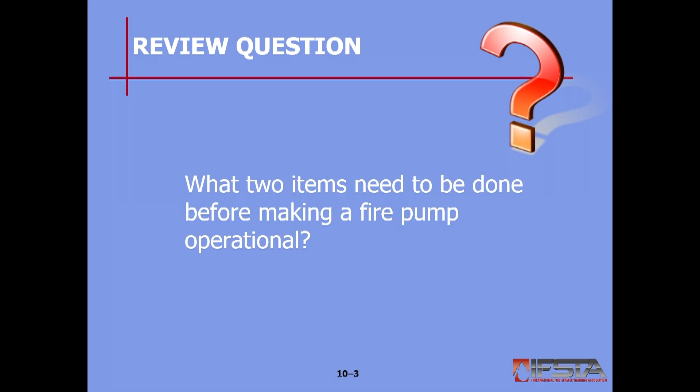What two items must be used before pumps are operational? The air brake and the chocks. We normally don't chock until maybe we got the pump in and we're flowing water, and we got a couple lines off. Then we'll chock it every time, Chief.

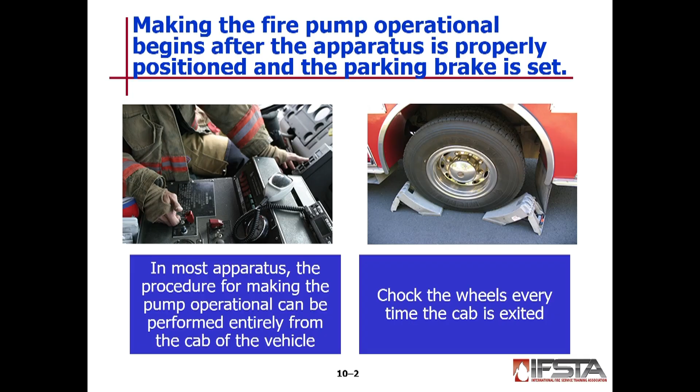Summarize facts about operating from the water tank. First thing we're going to do is use our onboard water tank. Even when we're connecting to a positive water supply, we've got 500 gallons on there, and typically we're going to get there, drop our tank, and I'm giving my tank water as we're hooking up to positive water. We cannot use the onboard tank as the sole supply of water unless it's something small, like a dumpster fire or a car fire maybe.

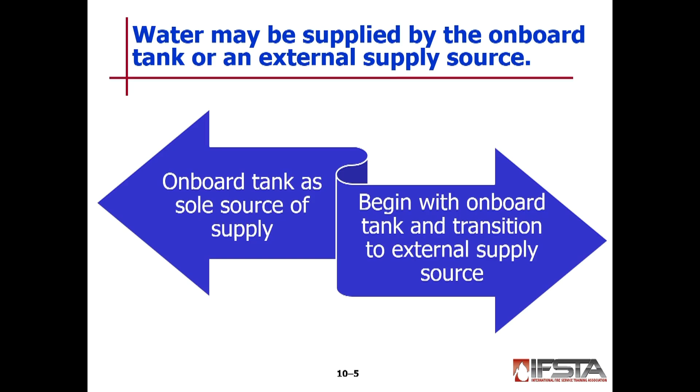Again, we're going to begin with our onboard tank, then transition to an external tank if we're depleting that. When putting the pump in operation, the initial water source is often our apparatus tank on board.

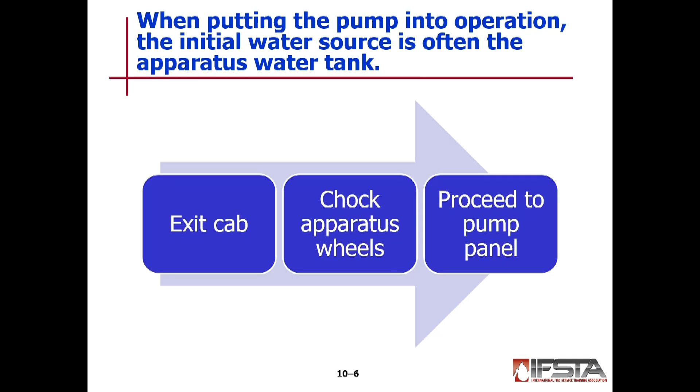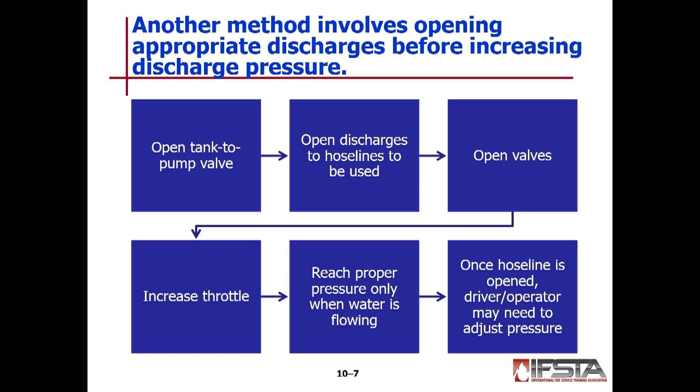We're going to exit the cab, chock the wheels, proceed to the pump panel. We're going to open up our tank to pump, open up the discharge that's being used, open your valves, increase the throttle pressure, dial in your pressure. Then once the hand line is open, the driver operator may need to adjust the pressure.

While the pump is in operation, the driver operator has multiple responsibilities: monitor all gauges and adjust the throttle.

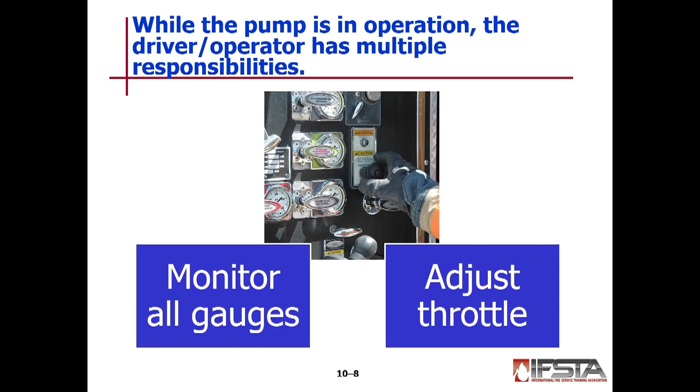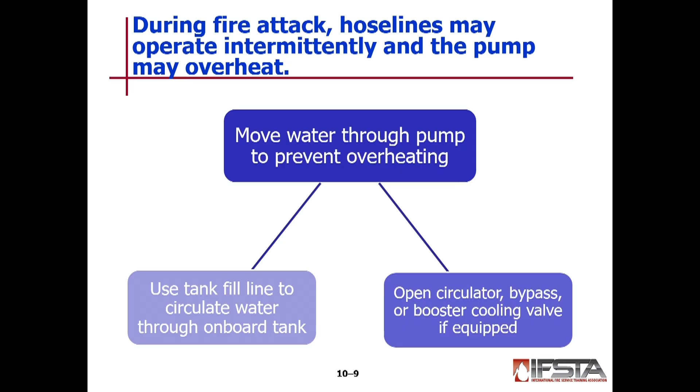During fire attack, hose lines may operate intermittently and the pump may overheat. We all know how to stop that from happening or prolong that. We're going to open up our circulator or our bypass, and we can also open up our booster tank, drop the nozzle in there, and circulate some water. Many methods to cool down your engine.

It is necessary to transition to an external water supply before depleting your onboard tank. If we get too low, we risk cavitation. So at about a quarter tank, you better be in positive water.

We're going to connect the supply hose to the appropriate pump intake, making the connection to the intake with a closed gate valve. We don't want to have it open, because then all our water in the tank is going to be going into our supply hose. Open up the bleeder valve on that gated intake, and adjust the discharge pressure using the throttle once we've got positive water.

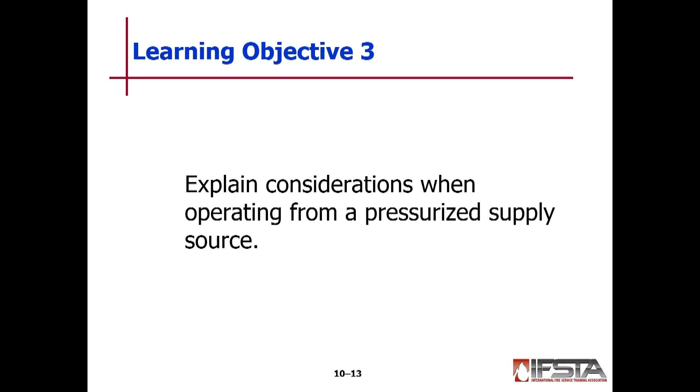Explain considerations when operating from a pressurized water supply. That's our hydrant or another pumper. Pumpers may operate from two basic pressurized water supply sources: a fire hydrant, and again, another pumper.

Driver operators should be aware of changes in pump volume and pressure. As discharge volume from the fire pump increases, incoming pressure from the water supply may drop. That's why we're always looking at that intake as we open up other lines.

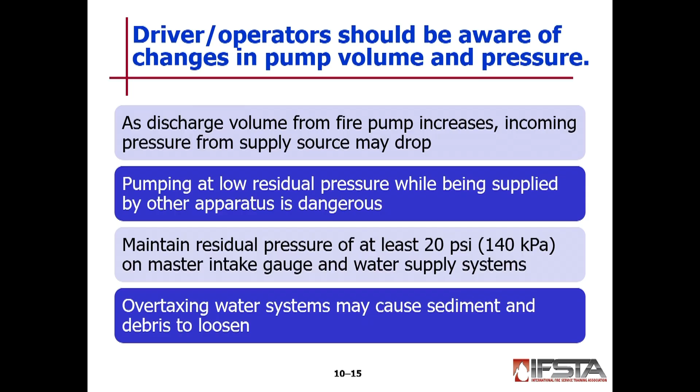Pumping at low residual pressure while being supplied by other apparatus is dangerous. Maintain a residual pressure of at least 20 psi on your master intake gauge and water supply system. Overtaxing systems may cause sediment and debris to loosen.

Safety and firefighting needs to be taken into account when choosing a hydrant. The closest hydrant may not always be your best choice.

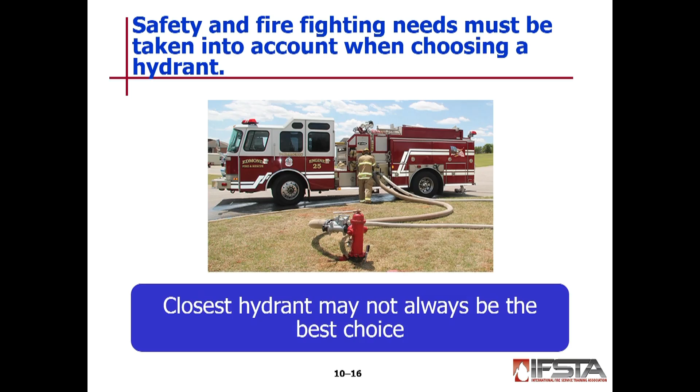To make an informed hydrant selection, knowledge of your water supply system is necessary. So we have our street and water exam that we do every year. And just from frequency of runs, we're pretty familiar with our water district, and being downtown, you know, first district, second district, you got a couple hydrants on each block.

Now we can pull up on our iPads, really convenient. We got a water map, we can see where our hydrants are before we even get there. As a sergeant though, remember it's a great tool to have, but if the iPad's down, we're looking down the block. Don't just get so reliant on that iPad to where we can't use some old school firefighting.

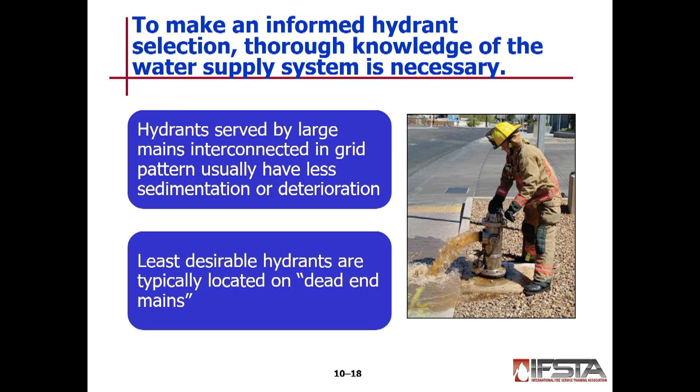Hydrants served by large mains interconnected in a grid pattern usually have less sediment and deterioration. We don't have to worry about any sediment in our hydrants, I've never seen anything. We do have some dead end mains though. I think there's one in Portland for sure, on Northwestern, it's a dead end main. You might have some issues there.

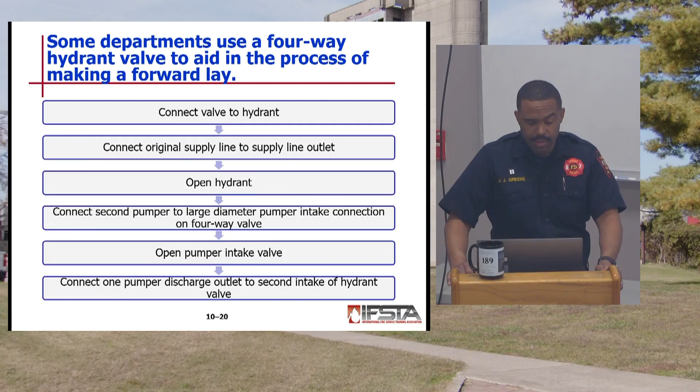Forward lay is the most common way for a pumper to be supplied from a hydrant. Some departments use a four-way hydrant valve to aid in making a forward lay. We do not do that. Connect valve to the hydrant, connect original supply line, open the hydrant, connect second pumper. We ain't gonna do that, each pumper's bringing in their own water.

We don't use those. Making a reverse lay, the hose is laid from the fire to the water source. So we used to do the reverse lay a lot when we were using our wyes. We laid to...

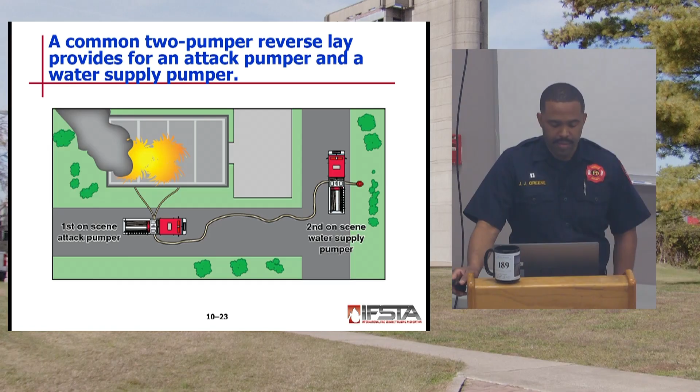A common two-pumper reverse lay provides for an attack pumper and a water supply pumper. You might have somebody finish your lay, or tell somebody to bring your water.

Lively class going on next door.

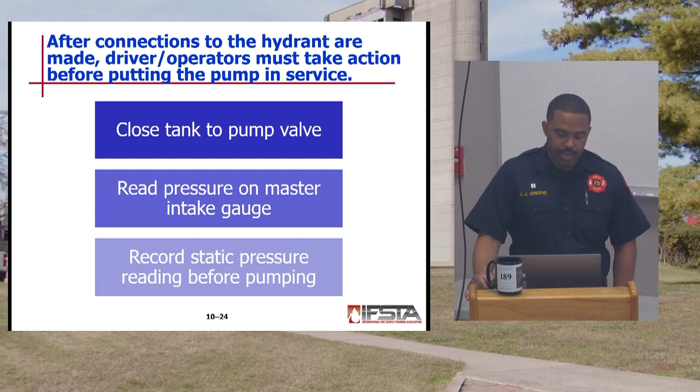After connections to the hydrant are made by the driver operator, action must be taken before putting the pump into service. Close the tank to pump valve, read the pressure on the master intake, and record the static pressure reading before pumping.

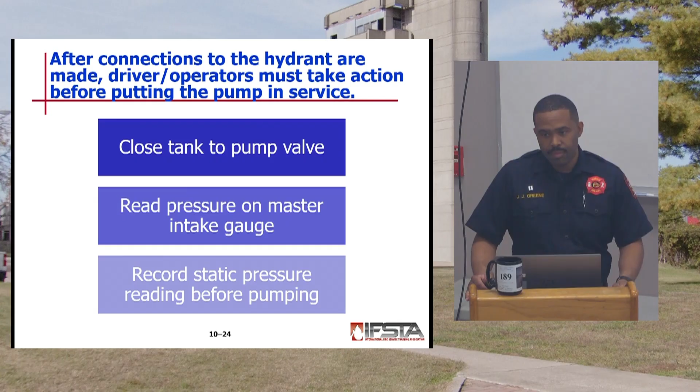Why would we close that tank to pump? Because you're getting water from the hydrant. You're in positive water at that point. Also, if something happens, say we have a main break because we've got multiple pumpers on scene, multiple hydrants, there could be a fluctuation.

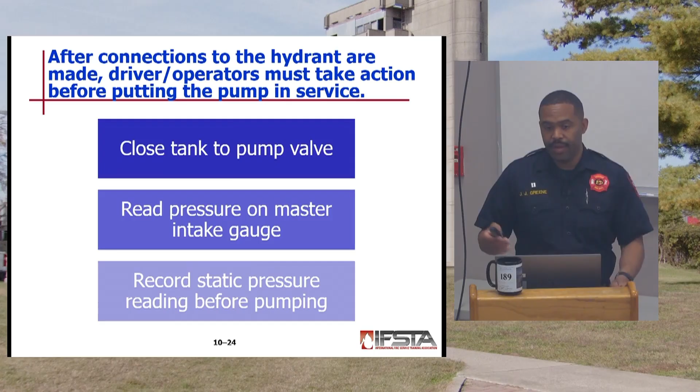Happened to me once in Portland on Griffiths. We had a fire, water main collapsed. Then we don't have a supply. We got guys inside. I can go back to that tank to pump, and that gives them enough time to get at least out of that structure. So that's the reason why we close that tank to pump after we're in positive water.

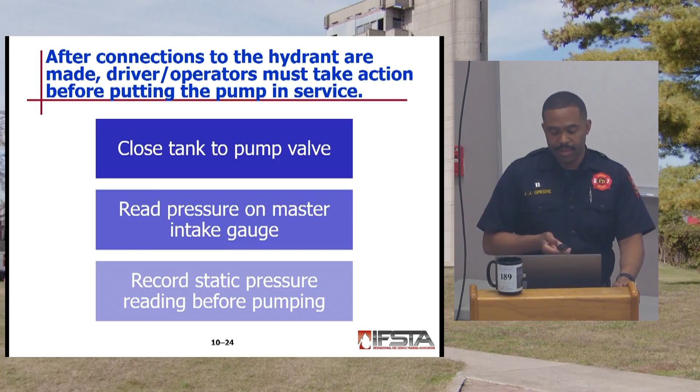If a water main breaks, is the first sign going to be less pressure coming into the apparatus, or is it going to be water on the road? It'd probably be the water on the road, because you'd have to be looking at that gauge exactly when the main breaks. So with this fire in particular, all of a sudden you see water coming out of the street, and you're like, what the hell? Then you see the street start to collapse and you're like, oh shit, water main break.

Take these items into consideration before putting the pump into service. Running the pump without water for a significant time may cause overheating or faster wear. If a hydrant is inoperable, disengage the pump drive system before relocating your apparatus.

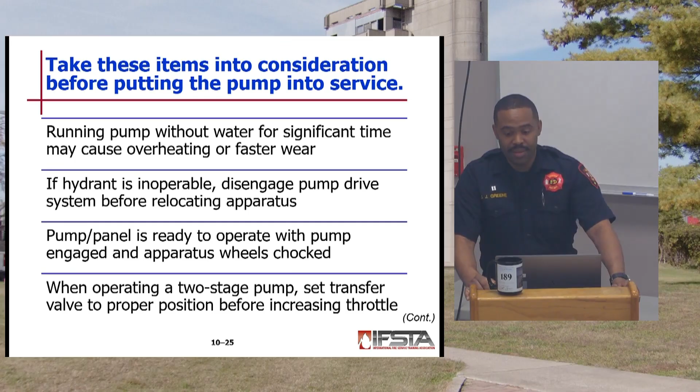Again, don't want to try to put it in drive while you're still in pump, or switch over to drive while you're in pump. You've got to put it in neutral with that switch and drive. Pump panel, make sure your pump panel is ready to operate with the pump engaged and apparatus wheels chocked. When operating a two-stage pump, set the transfer valve to the proper position before increasing the throttle.

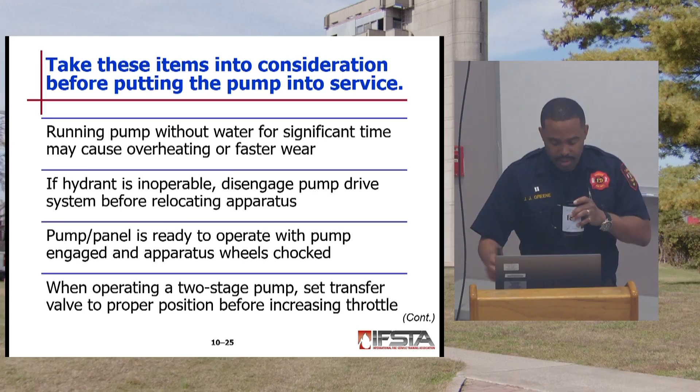Pump supplying relay operations or master streams require use of parallel setting on the transfer valve, because we're already pumping over half of our rated capacity.

Open all valves slowly, especially when using large diameter hose. Hose must be filled before pressure is established.

We're not gonna just crank it up to 150 and then open up that discharge. That dude's gonna be going for a ride. You could hurt somebody.

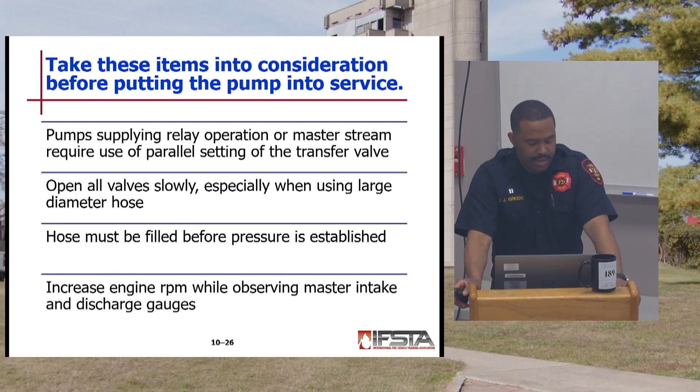Increase the RPM while observing your master intake and your discharges. Again, we don't want to go below 20 psi on our intake gauge, getting close to cavitation.

There are several methods used to prevent the pump from overheating. Establish continuous minimum flow during intermittent use of water. Pull a length of booster line or another small diameter line and fasten to a sturdy object. Open the valve that supplies the booster and recirculate it that way.

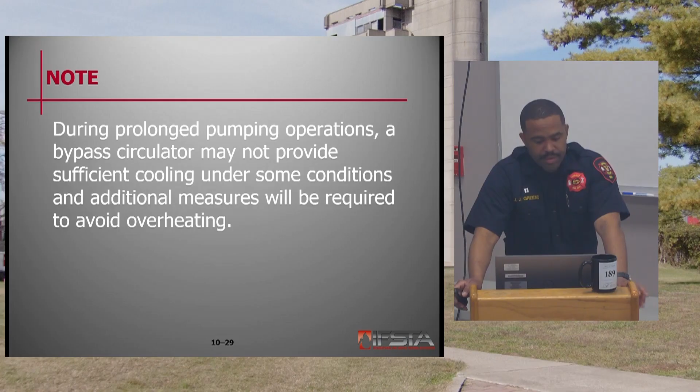During prolonged pumping operations, bypass circulator may not provide sufficient cooling under some conditions, and additional measures are required. Open up your discharge drain valves, let water circulate, or partially open your tank fill valve.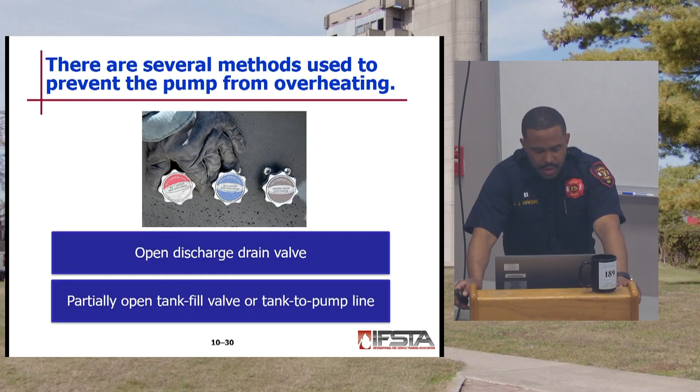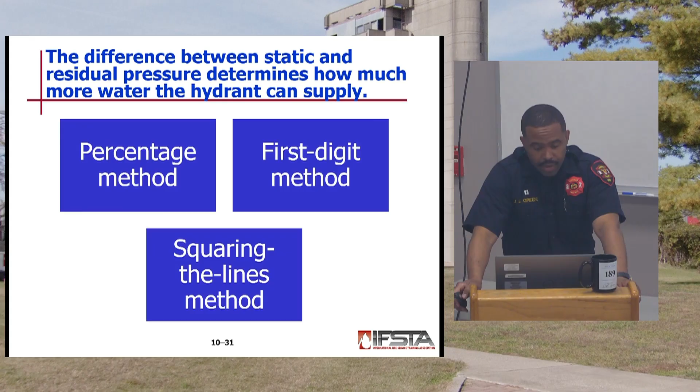The difference between static and residual pressure determines how much more water the hydrant can supply. These are three different methods to determine how much more water you can flow: percentage method, first digit method, squaring the lines method.

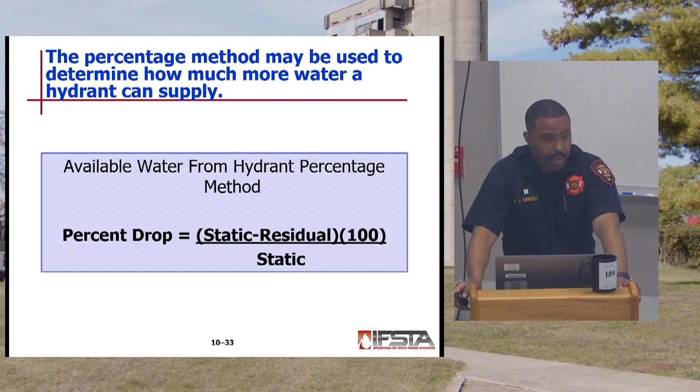So your percentage method: percentage drop equals your static minus your residual times 100, divided by the static. Simple stuff, guys, we should all know this.

The first digit method is a quick and easy way to calculate available water using PSI and GPM. We find the difference in PSI between our static and residual pressures, then multiply the first digit of static pressure by 1, 2, or 3 to determine how many additional lines of equal flow may be added.

Squaring the lines method may be used to calculate how much more water the hydrant can supply. We note the static pressure of the water system before any discharges are open, the usual static pressure under normal circumstances, and then determine the additional amount of water available by squaring the number of lines currently flowing and multiplying by the original pressure drop.

I don't know what Phil's teaching over there, but it must be a funny topic.

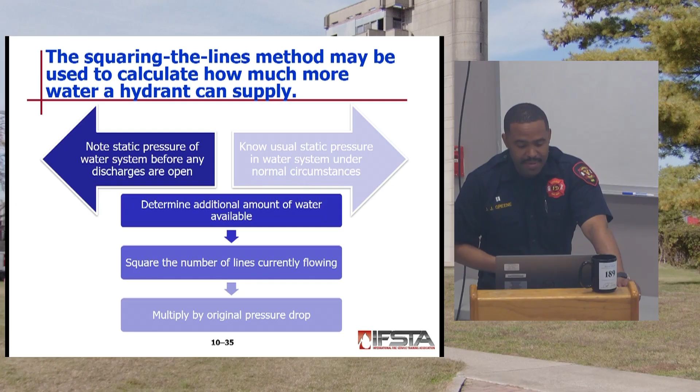Avoid water hammer and pressure surges when opening and shutting down lines. Water hammer is bad for the pumps. We've got to take care of our pumps.

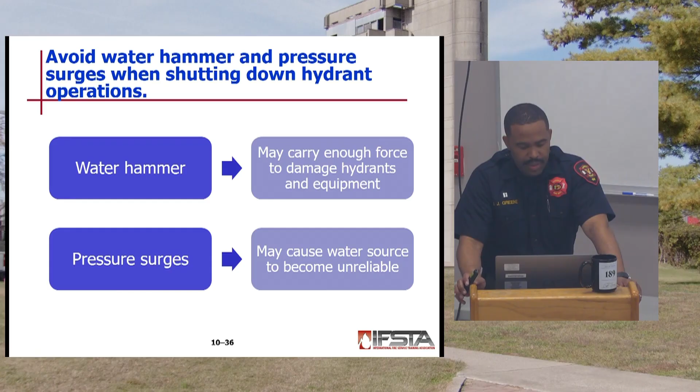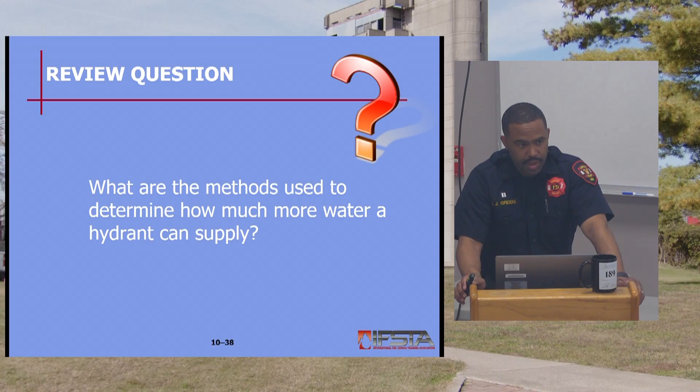Methods again: there's percentage drop, squaring, and... what's the other one? First digit method.

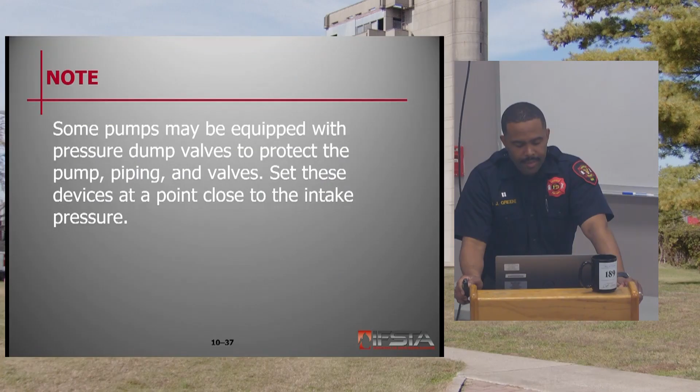So next objective, summarize facts about operating from a static water supply source, which is drafting. For this we need hard intake hose and we'll be drafting from a static source. We're probably not going to do this on a fire scene.

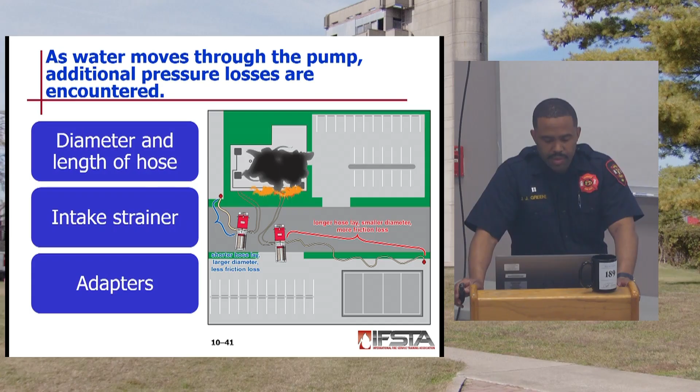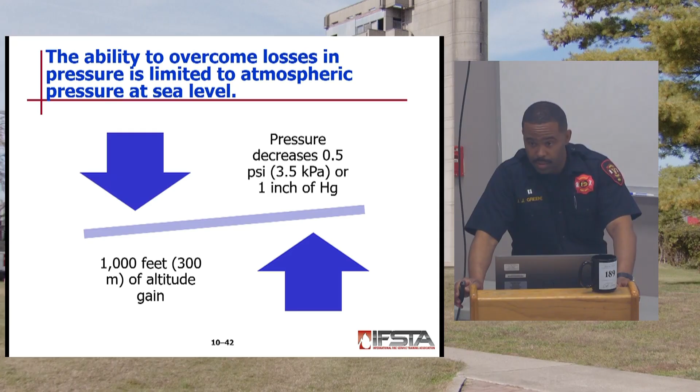As water moves to the pump, additional pressure losses are encountered. The ability to overcome losses in pressure is limited to atmospheric pressure at sea level, which is 14.7.

Indicators of cavitation: pressure gauge on the pump will fluctuate and hose streams may pulsate. The pump is going to make some noises like gravel passing through it, you're going to know it, and there will be a lack of reaction on the pressure gauge as you increase the throttle.

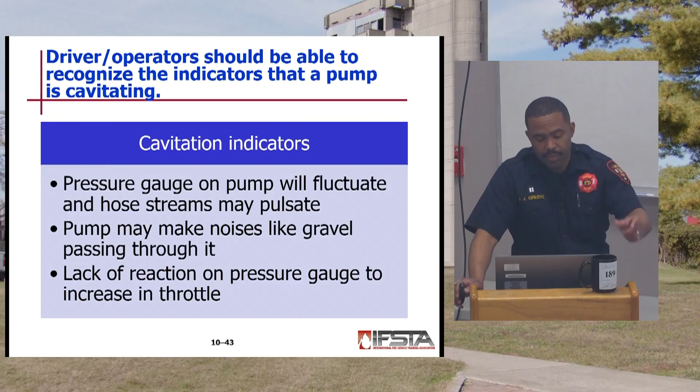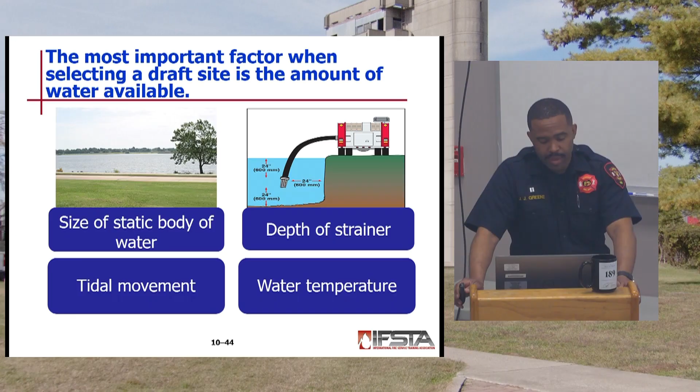Most important factor when selecting a draft site is the amount of water available. Size of body of water, tidal movement, the depth of the strainer, and the water temperature can affect it.

Type and quality of water must be considered when drafting. Oh, damn it, I keep reading the headline, and it's the same on multiple slides.

Non-potable water may be dangerous to the pump due to corrosion and deterioration.

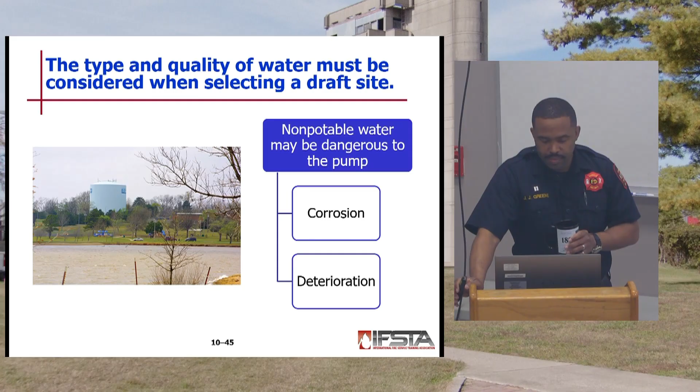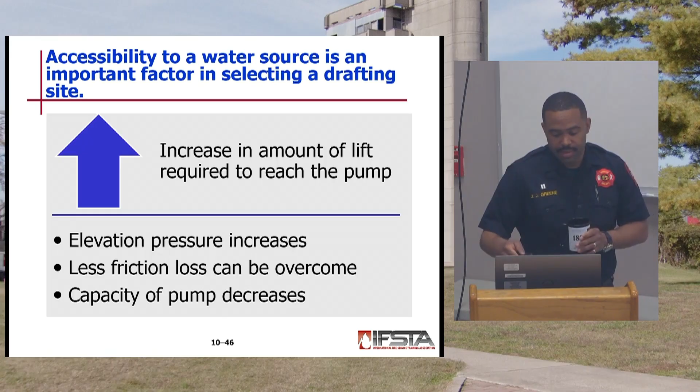Accessibility to... damn, I did it again. Increase in the amount of lift required to reach the pump. So if I've got to drop this hard suction down 30 feet versus 10 feet, it's going to be harder to get that water all the way up there.

Once a suitable drafting site is chosen, move the apparatus toward that position. We're going to place the apparatus directly at the location from which the intake may be deployed, set our parking brake, chock those wheels, and follow your local policies regarding placement of traffic control devices and warning lights.

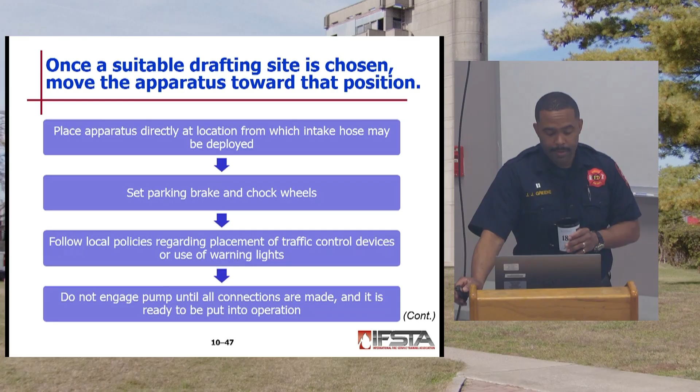Use a rubber mallet. This is how we're going to get that airtight seal. We're going to use a rubber mallet and tighten all the connections. Place each section of hose in line before the coupling is turned.

Fasten rope to the end of the strainer. That's important. Why do we want to do that? We want to keep it off the bottom if it's shallow, to keep it from picking up any sediment and debris.

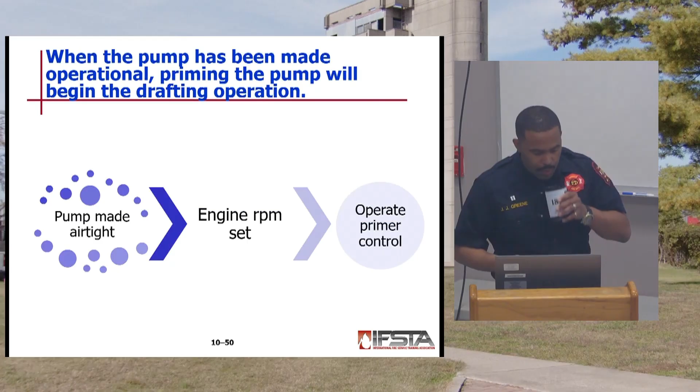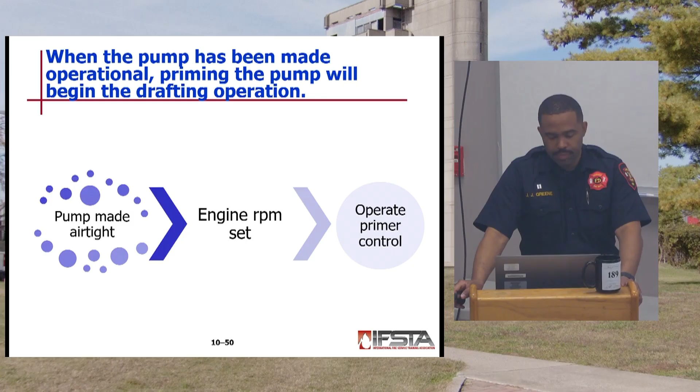When the pump has been made operational, priming the pump will begin the drafting operation. So, we're gonna throttle up and hit the primer.

Water comes up. This guy is using that mallet to get those seals nice and tight to create that vacuum. Like I said, if those seals aren't tight, you're not gonna be able to create a vacuum in your pump. You have air escaping, or more air is going to be coming in as you try to create the vacuum.

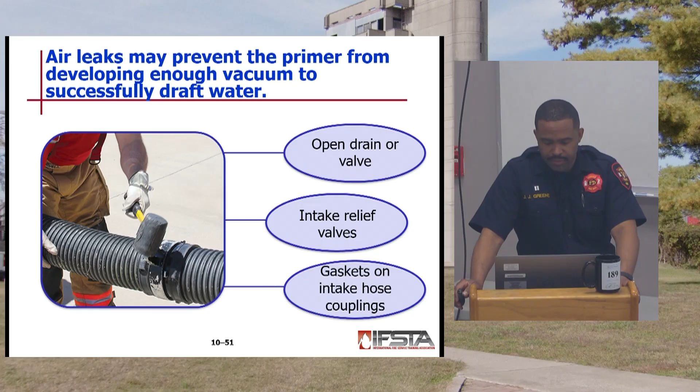Open drain valve, intake relief valves, gaskets on intake, hose couplings. After successfully priming the pump, slowly increase your throttle before opening any discharges. Your throttle is going to determine how much GPMs you're throwing out.

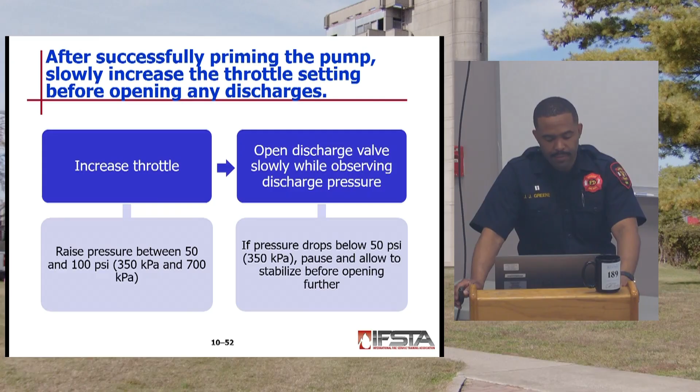Air leaks on the intake side of the pump can cause us to lose our draft. Whirlpool allowing air to enter the pump, and air leakage due to defective pump packing.

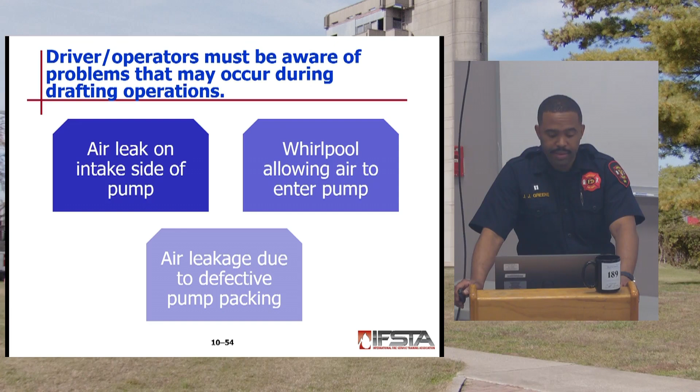Strainer should be flow tested. Gradual increase in vacuum with no change in flow rate may indicate that a blockage is developing. Blockages often occur after the pump has been operating at a high rate of discharge.

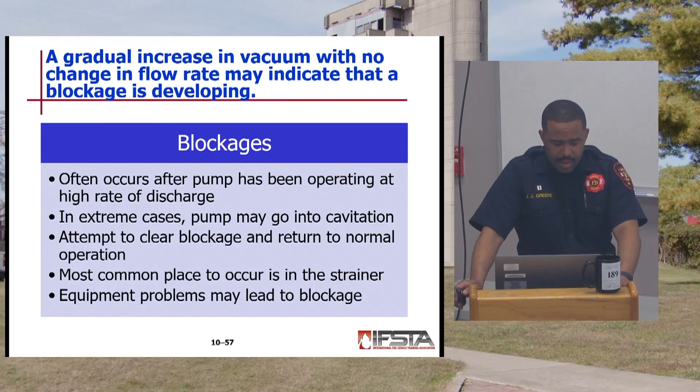In extreme cases, pump may go into cavitation because you're blocked, you're not getting anything in. It's going to run that pump empty. Attempt to clear the blockage and return to normal operation. Most common place for this to occur is in the strainer. It's going to be a big issue.

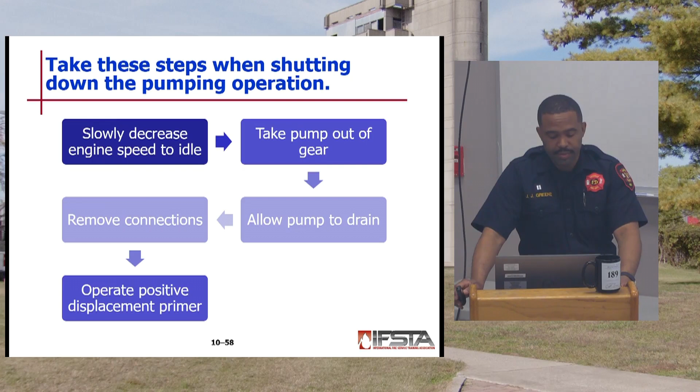To shut down during pump operations: slowly decrease the engine speed down to idle, take pump out of gear, allow pump to drain, remove all connections, and operate the positive displacement primer. Anytime we draft, what are we going to do to our pumps? Backflow, right? Got to get all that stuff out.

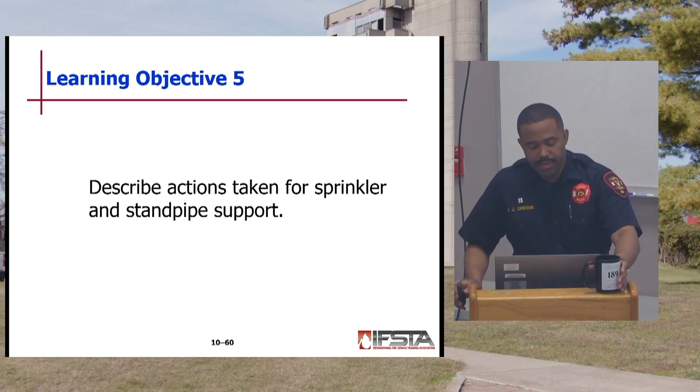Next objective: describe actions for sprinkler and standpipe support. Driver operators are responsible for providing adequate support to the fixed fire suppression systems, automatic sprinklers, and standpipes.

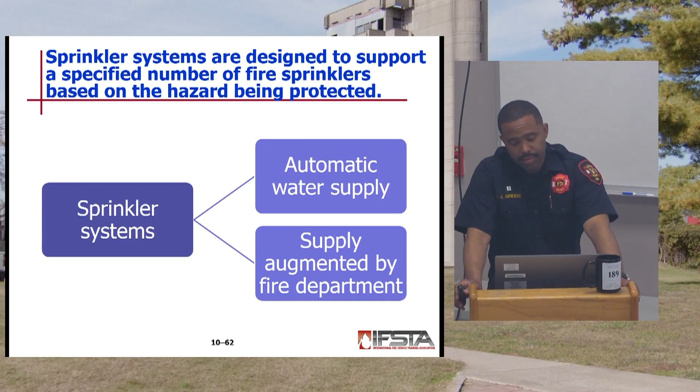Sprinkler systems are designed to support a specific number of fire sprinklers based on the fire hazard being protected. Sprinkler systems can be automatic water supply or supply augmented by the fire department, depending on installation of occupancies.

Pre-incident planning, right? We do our target hazards, and then a bunch of our high-rise buildings that we respond to. We're always looking where our connections are. If you make a run to somewhere you haven't been, and you got time after, if it's a med run, take a walk around the building and familiarize yourself.

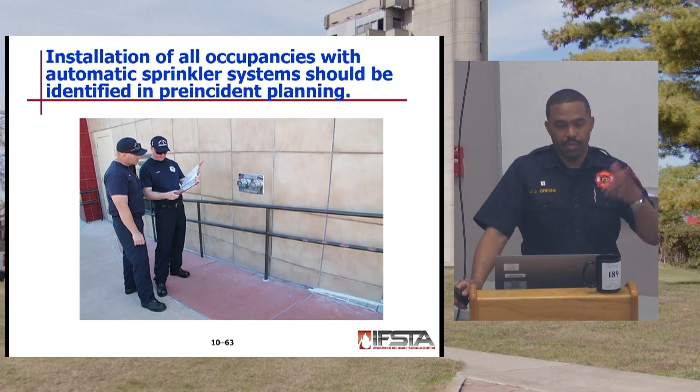Also, anytime you see new construction, right? We're all good at that. If we're driving by, we see them building something every couple weeks or something, we might stop by and see, okay, I see the water shutoff's going to be there. Walk around the construction site, you see where stuff's going as it's going up. That way, if you miss the day they do the walkthrough, you're still pretty familiar with it, right?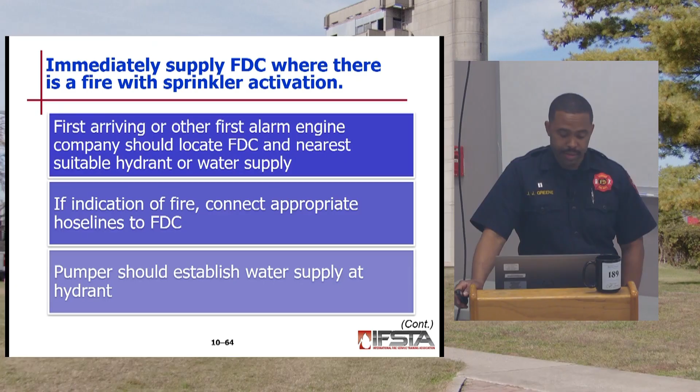Immediately supply the fire department connection where there is a fire with a sprinkler activation. First arriving or other first alarm engine company should locate the fire department connection and the nearest hydrant. If indication of a fire, connect appropriate hose lines, and pumper should establish water supply at the hydrant.

Immediately supply the fire department connection. Confirm presence of actual fire conditions before the pumper begins to flow to the fire department connection, then slowly develop the amount of pressure required to supply the system.

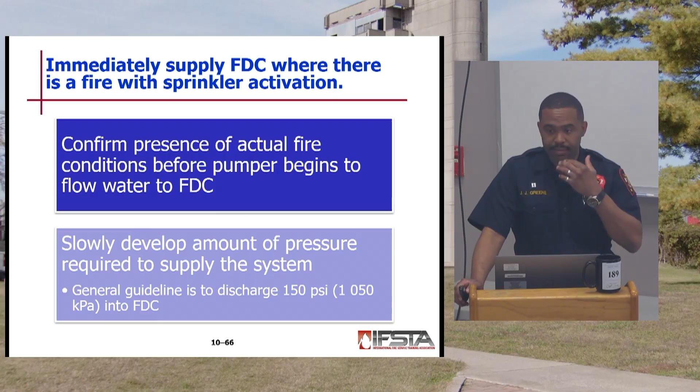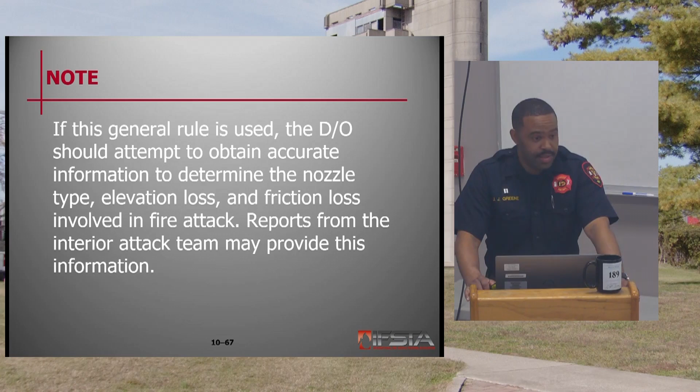Guidelines: general guideline is to discharge 150 psi into the fire department connection. So, 150 on sprinkler, you got your appliance, add another 15 psi, then you got to find out what floor we're on, 5 psi per floor. Got a little cheat sheet in most of the pumpers, right? If you need some quick numbers, look at that sheet. And if they ask for more pressure, give it to them.

Hopefully they realize a lot of them have the pressure reducing valve in there, and hopefully they're utilizing that too. If we need more pressure, we'll try adjusting that on the inside.

Firefighters should check sprinkler valves as soon as practical, opening closed valves in most circumstances, and ensure the stationary fire pump is operating if it supplies a sprinkler system.

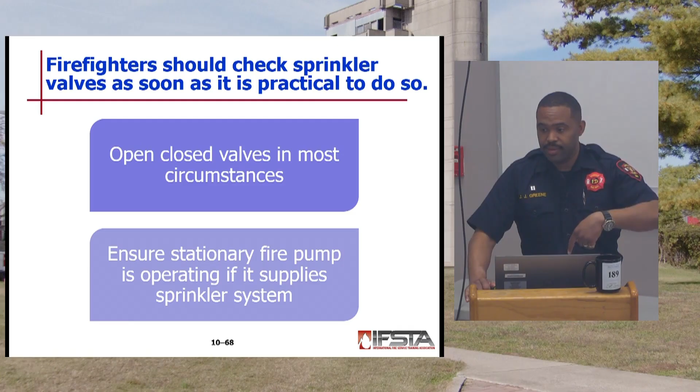A lot of times in the power surge, you'll hear a dry system go wet. You'll hear that sprinkler system, the compressor downstairs or whatever.

Let's see, standpipe may be wet or dry. I always keep getting ahead of myself, right when I say something, the next slide pops up.

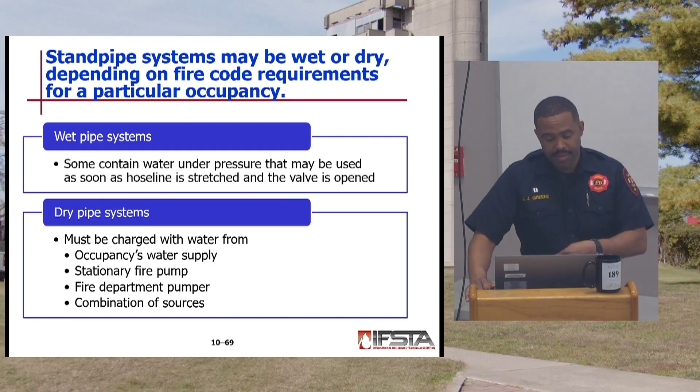A wet system contains water under pressure that may be used as soon as the hose line is stretched and the valve is opened. A dry system must be charged with water from either the occupancy's water supply, a stationary fire pump, or fire department pumper.

Always supply the fire department connection to ensure adequate flow and pressure is provided for firefighting operations. Anytime we have a fire in a high rise, we're connecting to the standpipe and the sprinkler, not just relying on that fire pump.

Hose lays for use in sprinkler and standpipe systems: pump discharge will depend on pressure loss, friction loss in the hose lay from the pumper to the fire department connection, friction loss in the hose on the fire floor, nozzle pressure, and type of nozzle in use.

What type of nozzle do we use on our high-rise packs? Selectable gallonage, and then we can always take that fog tip off and we've got a smooth bore nozzle. We need 100 psi for an effective fog nozzle, and 50 psi for a smooth bore. So if we've got low pressure, we'll switch to that smooth bore.

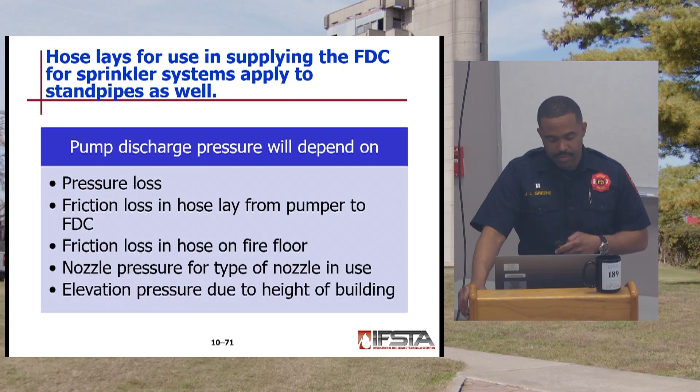Do not use pump discharge pressure in excess of 185 psi unless the standpipe system is designed to do so.

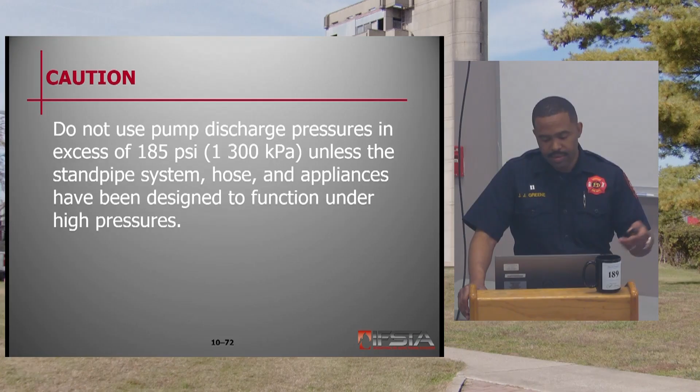Driver operators should be aware of considerations when operating standpipe systems. When equipped with a pressure reducing valve, elevation must be based on the total height of the standpipe or zone being used. If pressure at a particular valve is less than that for which the valve was adjusted, it will result in inadequate pressure for attack lines.

Vandals may tamper with valves in dry standpipe systems, so it's always a good idea to flush those before you connect your hose to it.

And when a dry standpipe is charged, there will be a time delay as water fills up the system and expels air. If we're on the 10th floor and connect to that system, the water's got to rise all the way up.

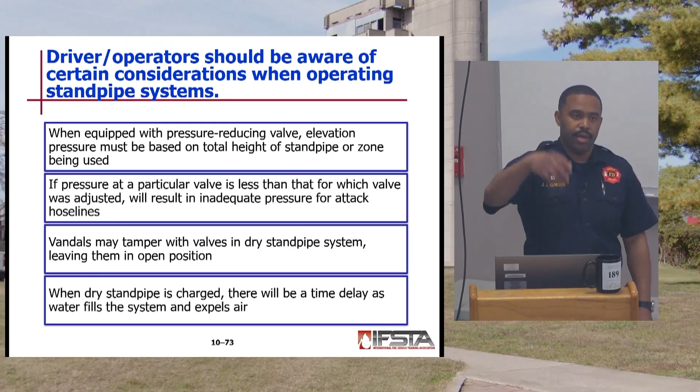Many manual standpipe systems are designed to be pumped at a pressure of 150 psi.

Some standpipe systems may require adaptation in order to be used. We've all opened up the sergeant's compartment and seen all those different couplings, so we can handle whatever we pull up on.

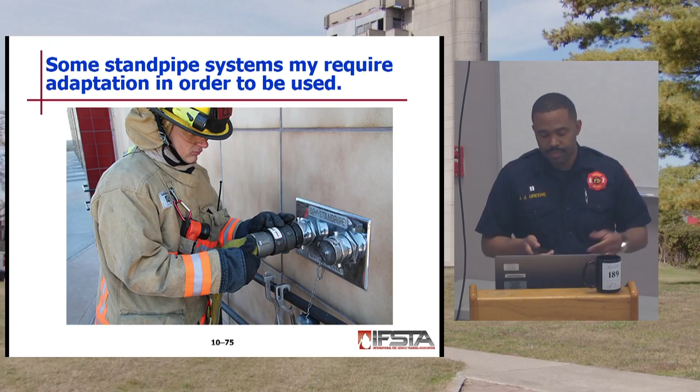Might need a double male, double female. You don't know until you get there, but we have the tools to make it work.

I always thought of it this way: a lot of guys hated being an engine sergeant because you're not going in anymore, you're outside on the pump panel. But it's like one of the first times you get to think on the fire scene for yourself and just be a problem solver, figuring out multiple ways to do multiple things. So if you like figuring stuff out, it can be a fun job.

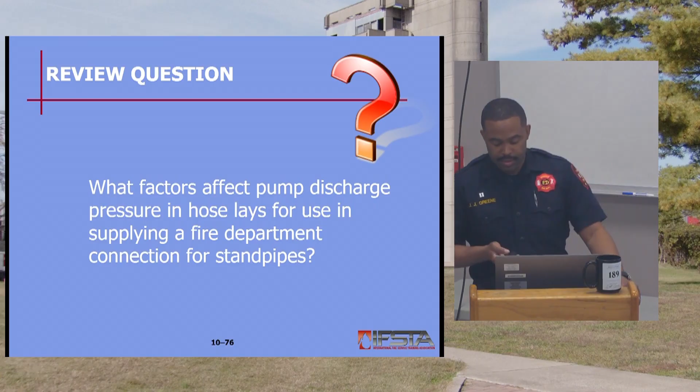Explain actions taken when troubleshooting pumping operations. Case in point, not everything's going to go to plan. You've got to have a plan B and figure out how to take care of it, so be prepared to troubleshoot and correct issues that may arise during pumping operations.

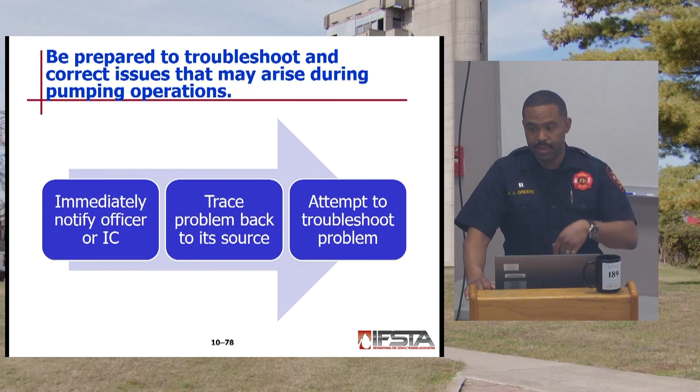First thing we're going to do is immediately notify your incident command, then trace the problem back to its source. We typically start back to square one: this thing's not pumping, let me restart. Let me make sure the parking brake's set, put it back in neutral, take it out of pumps, put it back in pumps, and go from there.

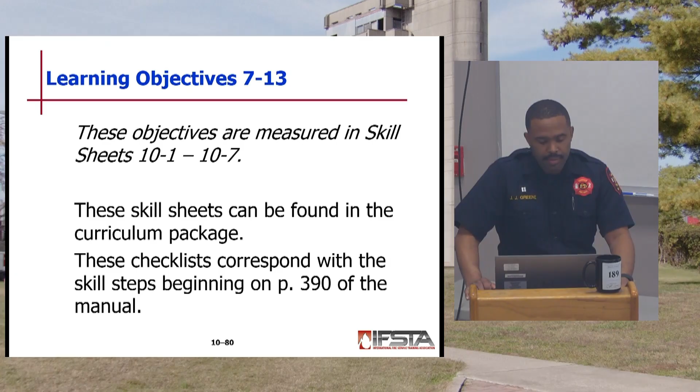Next objective is 7 through 13, these skills sheets can be found— oh, I ain't doing no skill sheets. Oh, we're done. Wow.